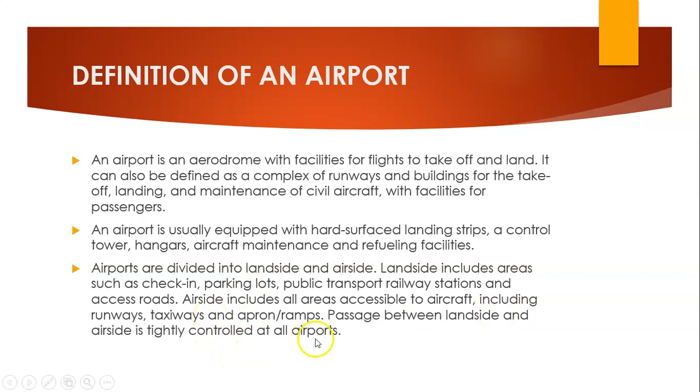The next thing we look at is the International Civil Aviation Organization, ICAO. The International Civil Aviation Organization was formed in 1947 under the auspices of the United Nations, and it established Flight Information Regions, FIRs, for controlling air traffic and making airport identification simple and clear.

The world's nations claim the right to control their own airspace, that is the portion of the atmosphere above their territorial jurisdiction, up to reaching space limits of between 80 to 100 km from sea level. For navigational purposes, this airspace is typically subdivided into classes, each with their own flying rules.

Airspace classification and their flying rules may vary between countries, although most countries follow either the ICAO's classification or a modified version of it. Airspace limits are shown in official charts.

We need to look at classification of aircraft size and runway length, and aircraft characteristics related to airport design. So when we look at how the aircraft properties or physical characteristics affect the design of the runway or provision of runway, aircraft characteristics are essential for the planning and design of airports.

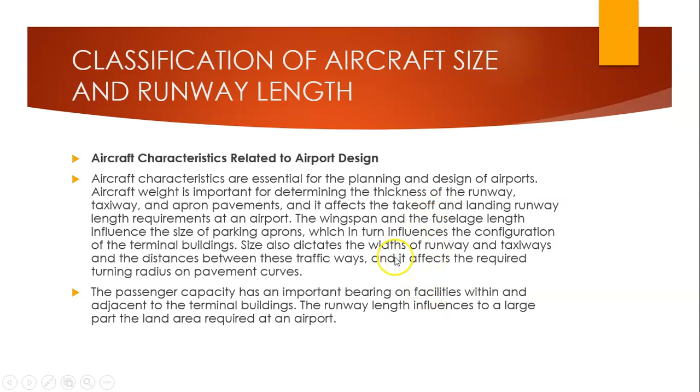So the features of the aircraft go a long way in affecting the size of the airport and its design. We also talked about the passenger capacity, because it also affects how the airport will look like, it affects the design of the airport. And the runway length also affects the size of the land provided during the design of the airport, to accommodate the taking off and landing of aircraft.

So we look at classification of aircraft size and runway length, the various runway lengths. Here we have the code elements, code number. We have code number 1 to 4. We have runway length, those that are less than 800 meters. We could name them A, and it accommodates aircraft with wingspan less than 15 meters.

Also, the outer main gear wheel span of the aircraft should be less than 4.5. The second one falls under code number 2, with the runway length from 800 to 1200, greater than 800 but less than 1200.

So the code falls between code letter B, and the wingspan is between 15, but it must be less than 24 meters. The outer main gear wheel span should be between 4.5 to 6. It must not be more than 6.

Then the third one is between 1200 to 1800. This is 1800, not 1200. So make necessary correction on this.

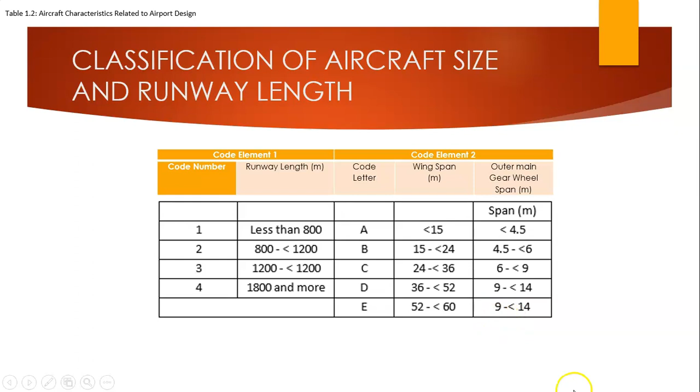Any other one falls between E, which has a wingspan of 52 to 60 meters, and the outer main gear wheel span should be between 9 meters to 14 meters. So we look at a sketch of an aircraft to be able to understand its characteristics.

The next thing we want to look at is the aircraft turning radius on pavement curves. Remember we said that the fuselage length and the wingspan length goes a long way to affect the size of the parking apron and other facilities.

So here we're trying to look at the turning radius when an aircraft tries to make a turn. This is the radius it takes. You can see from here the part of the nose gear. This is the nose gear and this is the main gear.

So you can see what we have here, part of the main gear. This is the radius it turns. This is the radius the nose gear takes. You can see it. Then we have the minimum turning radius.

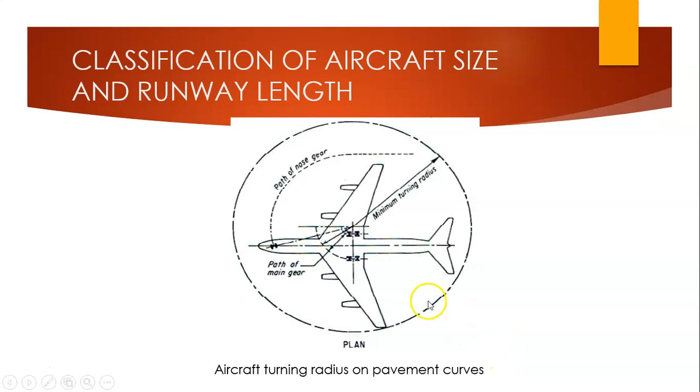We call this the minimum turning radius, while this one is the maximum turning radius. So the part of the main gear, you can see its part or its radius. This diagram gives us a clear view of the aircraft turning radius on pavement curves.

The next thing we want to look at is the components of aircraft weight. Based on the weight of the aircraft, we will be looking at the various terms we use in defining aircraft weight.

The first one is operating empty weight. Under operating empty weight, we're talking about the basic weight of the aircraft, including crew and all necessary gear required for flight, but not including payload and fuel.

The operating empty weight is not a constant for a passenger aircraft but varies with the seating configuration. So the operating empty weight excludes payload and fuel. Any other thing, the crew and the landing, every other component of the aircraft, excluding payload, which is every load that is paid for.

Including live human beings or passengers boarding the vehicle and goods that they are paid for. So they make up the payload, and with the fuel, when we exclude these from other things that are necessary for the taking off of the aircraft, we call it the operating empty weight.

Then the zero fuel weight, we call the zero fuel weight as the operating empty weight plus the payload. So we'll add the payload and exclude the fuel weight, so we call it the zero fuel weight. It means it contains no fuel.

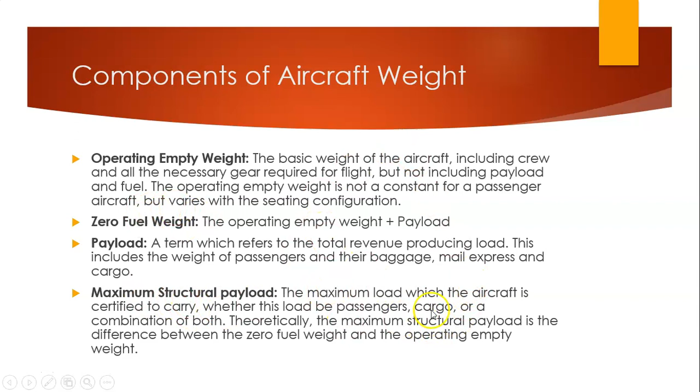Then the next thing we look at is the maximum takeoff weight of the aircraft. This is the maximum weight authorized at brake release for takeoff. It excludes taxi and run-up fuel, and includes the operating empty weight, trip and reserve fuel, and payload. So we are looking at the structural takeoff weight.

This weight excludes the fuel required for taxiing before takeoff. So when the aircraft is about to take off, it includes its own structural weight, which is the operating empty weight, plus the trip and reserve fuel, as well as the payload. It excludes any other fuel used for taxiing or movement before takeoff.

Then the maximum ramp weight is authorized for ground maneuver, including taxi and run-up fuel. As the aircraft taxis between the apron and the end of the runway, it burns fuel and consequently loses weight. The difference between the maximum structural takeoff weight and the maximum ramp weight is very nominal.

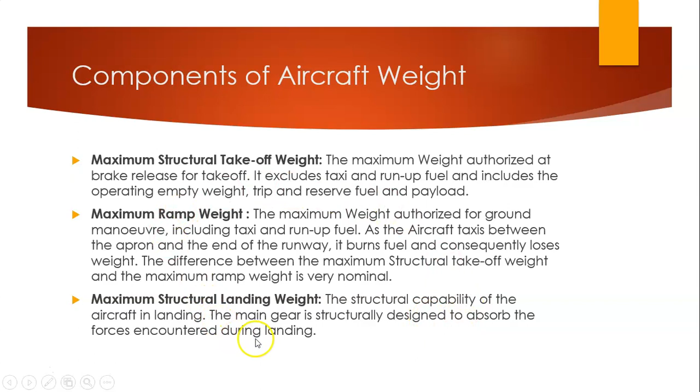The maximum takeoff weight varies between 36,000 kg to 350,000 kg. The maximum number of passengers varies between 65 to 500. Runway length for typical airline aircraft varies between 1,800 meters to 3,600 meters. It will be noted that the heavier an aircraft, the longer it is, and the greater is its wingspan.

As the range of an aircraft increases, the proportion of trip fuel to takeoff weight increases, while the percentage of payload decreases. So we are trying to look at the minimum and maximum weight of aircraft and the runway length for airlines that should be provided to accommodate takeoff and landing, which we said is between 1,800 to 3,600 meters. These are things we need to consider.

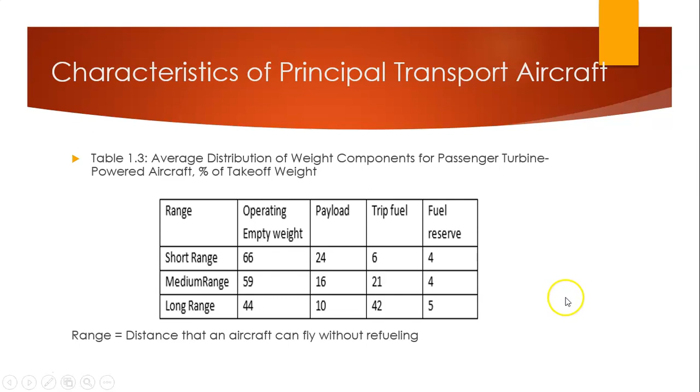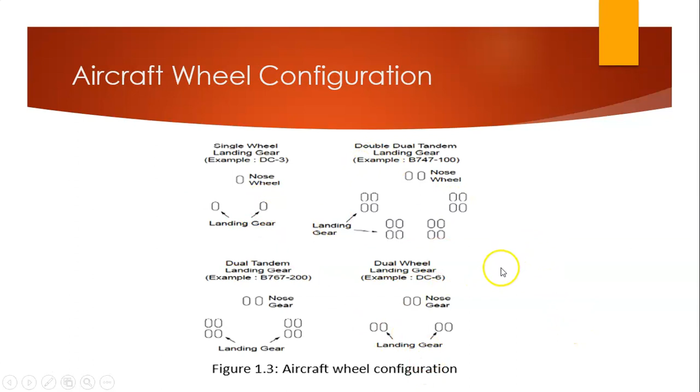So we're trying to look at aircraft wheel configuration, so we'll be able to use it to distribute loads during airport pavement design. We'll see how these can be useful in carrying out our airport pavement design.

Next we look at the static weight on the main gears and the nose gears. Based on the diagram we looked at, the distribution of the load between the main and the nose gears depends on the type of aircraft and the location of the center of gravity of the aircraft.

For any gross weight, there is a maximum aft and forward center of gravity to which the aircraft can be loaded for flight in order to maintain stability, which is very important. The distribution of weight between the nose and main gear is not constant. For pavement design, it is normally assumed that 5% of the weight is supported on the nose gear, while the remainder is on the main gears.

Thus, if there are 2 main gears, each gear will support 47.5% of the total weight. Let's take a simple example to clarify this point.

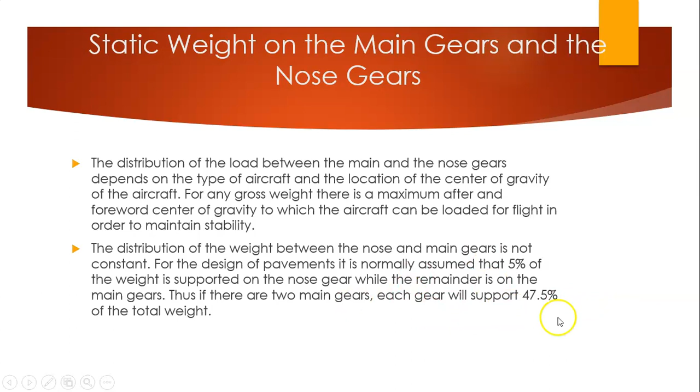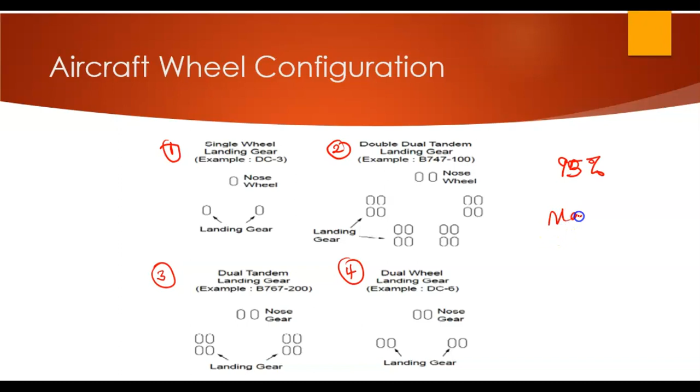For the structural design of aircraft pavement, we consider that 95% of the weight of the aircraft goes to the main gears, while 5% is carried by the nose gear. Based on the diagram, you can see the nose gears or nose wheels here, and the main gear here. So we are saying that 95% of the weight of this aircraft is carried by the main gear, while 5% is carried by the nose gear.

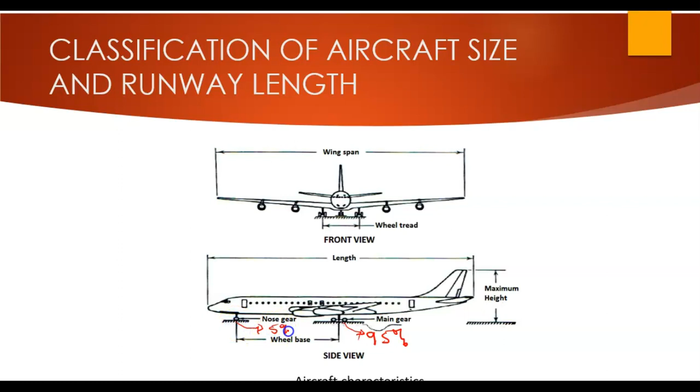So what we need to do is go back to the dimensions. We said the maximum takeoff weight varies between 36,000 to 350,000 kg. Let's use these weights for the purpose of illustration and our calculation.

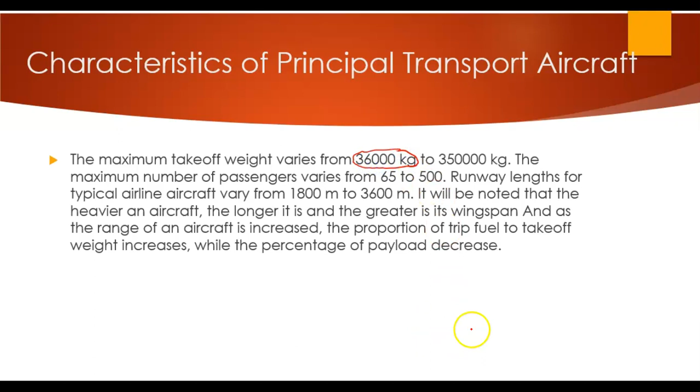For our single wheel landing gear, if the total weight of the aircraft is 36,000 kg, it means for this single wheel landing gear we want to know the distribution of load on the nose wheel and on the landing gear.

We said 95% is carried by the main wheel, beg your pardon. We have two landing gears sharing 95% of the weight, and 5% is carried by the nose wheel. So we calculate 0.95 times 36,000, and 0.05 times 36,000.

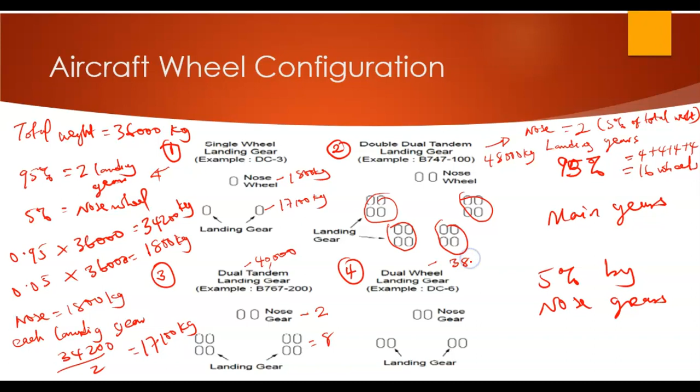Let's say this one is 40,000, and this one is 38,000 total weight. Why this one is 2, though we said we have a total of 4, is because the landing gears are 2 plus 2. I have this and this, so when we add it, we will have a total of 4. And the weight is 38.

So now let's go back to our board for calculation. The first thing we have here is our 36. The second one, number 2, is the double dual tandem. This one is for, we perform calculation for a single wheel landing gear, where the nose wheel has only one wheel.

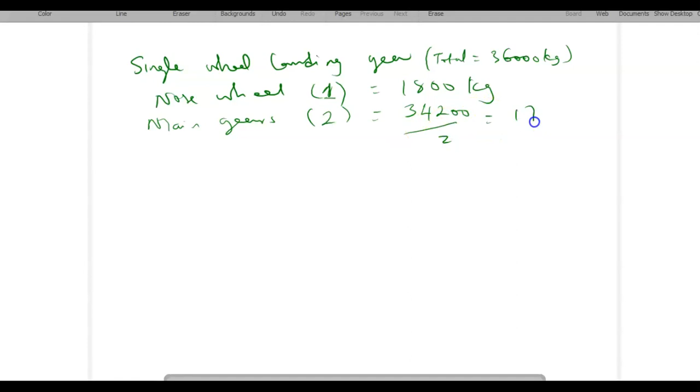Nose wheel is 1 in number, and it carries a total weight of, my calculation, 1,800 kg. The total weight is 36,000 kg. Then the main landing wheel, we'll call it the main gears. This one, they are 2 in number, so we're sharing the load: 34,200 over 2, which is 17,100 kg. So this is our first calculation.

For the second one, we have already done the analysis previously. Let's look at what we've done. Here you can see what we have for the double dual tandem landing gear. Total weight of 48,000. Then we have a total of 2 nose wheels and 16 landing wheels. So this is the dual tandem, number 2.

So for this one, the nose is equal to 2 wheels, the nose gear. The main gear is equal to 16 wheels, and we are sharing a total load of 48,000 kg.

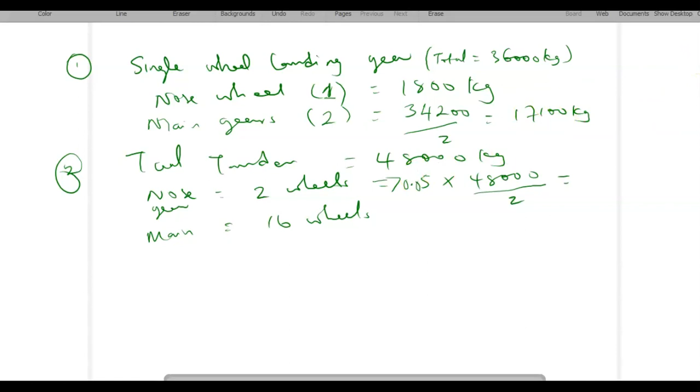So what we have to do here: the 5%, which is 0.05, multiplied by 48,000, and because there are 2, we divide by 2. Let's pick a calculator to show our calculation. 0.05 times 48,000 gives us 2,400. We divide it by 2, and this gives us 1,200 kg.

For the main gears, this will be equal to, we multiply by 0.95. So we times it by 48,000 and divide by 16 wheels. 0.95 multiplied by 48,000 equals 45,600. This is the total weight.

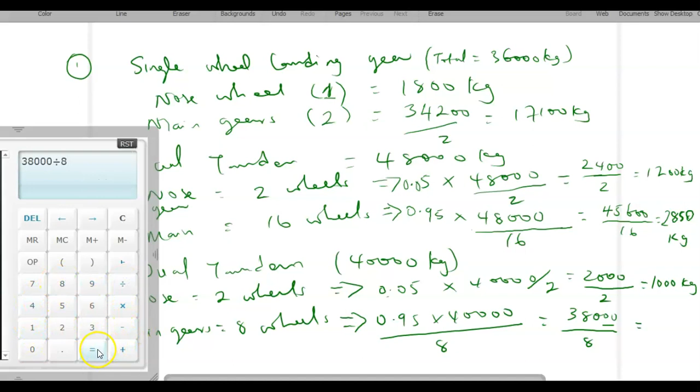Then for this one, we go back to our calculator. We have 0.95 multiplied by 40,000, equal to 38,000. We divide this by 8 since there are 8 wheels. 38,000 divided by 8 equals 4,750 kg. That's what we have on each wheel.

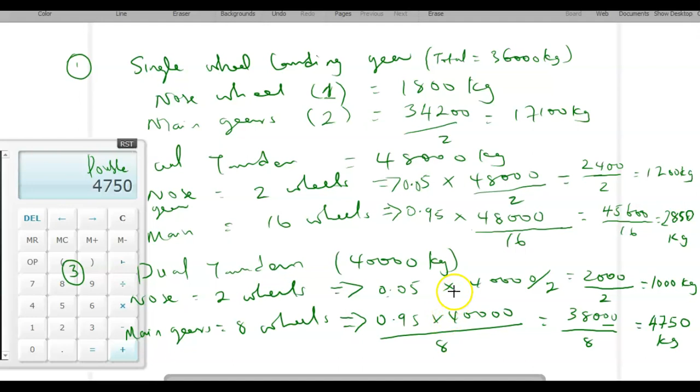So this is for the dual tandem. We drag our calculator back and wipe our board for clearer space.

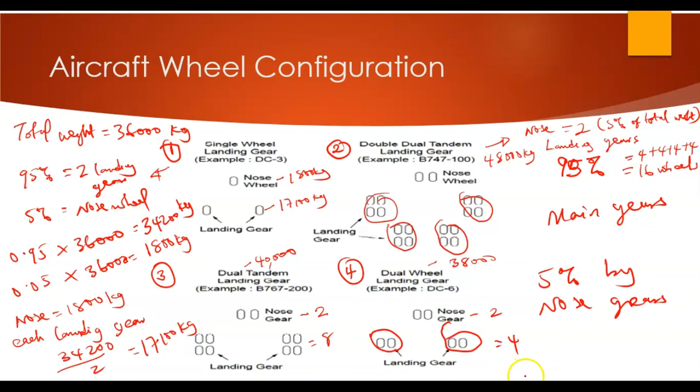So for the last example, the fourth example, let's go back to our previous calculation. For the last one, we have the total. This one is for an aircraft with dual wheel landing gear. Total weight is 38,000. Nose wheels are 2, and main landing gears are 4. Go back to our calculation sheet. Here we have this for a dual wheel, the dual wheel landing gear. So write down dual wheel. We have the nose, total is 38,000 kg.

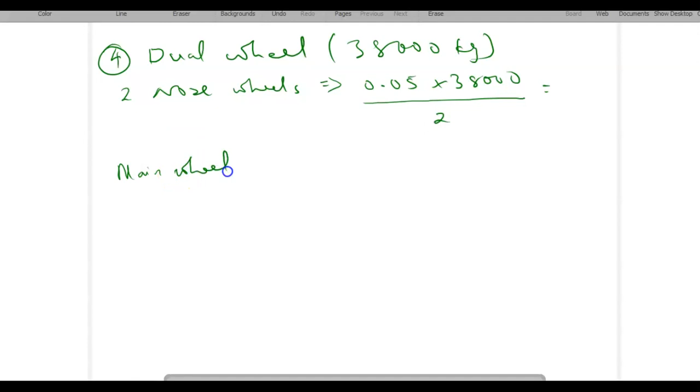We have two nose wheels. This will equal 0.05... we'll look at 5% carried by the nose wheels, times 38,000, divided by 2. We'll drag our calculator to get the appropriate answer. Then for the main wheels, or main gears, there are 4 in number, and 95% of the load is carried by these wheels. 38,000 divided by 4 since they are 4 in number. We drag our calculator out to perform our calculation.

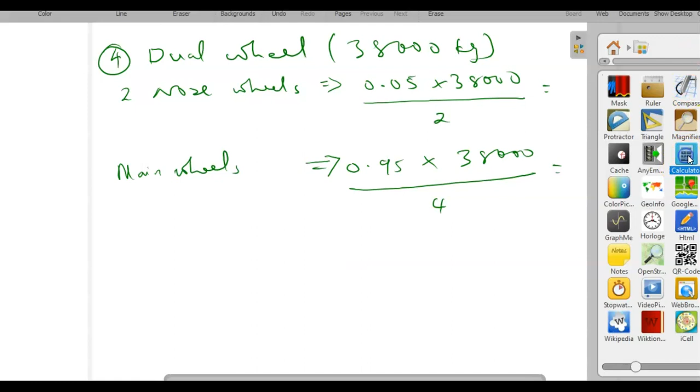For this one, we're looking at 0.05 multiplied by 38,000, equal to 1,900. 1,900 divided by 2 is equal to 950 kg.

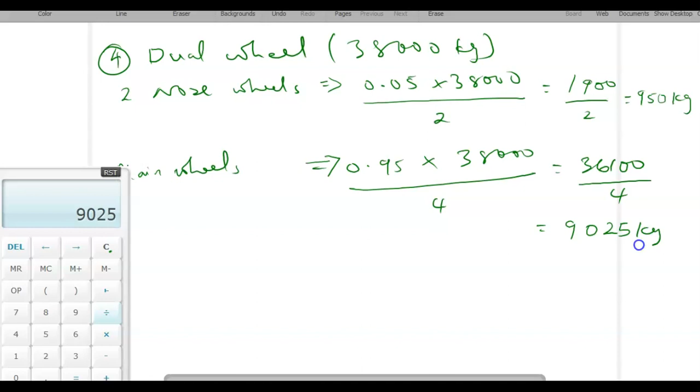For this one, 0.95 multiplied by 38,000 leaves us with 36,100. We split this by 4 gears. 36,100 divided by 4 equals 9,025 kg, which is the total weight carried by the main gears.

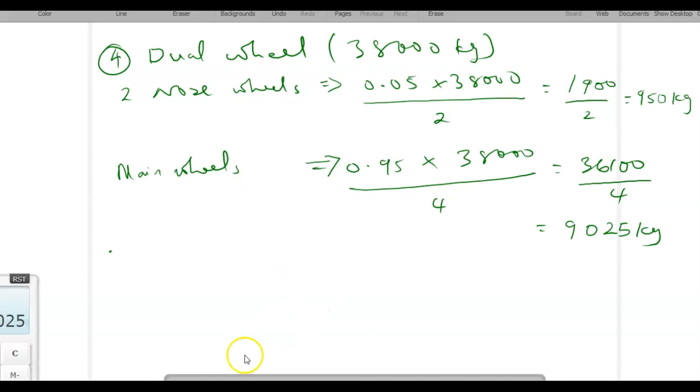So the total weight for the main gears is this, and for the nose gears is this. We've shown how aircraft weight is distributed: 5% on the nose gears and 95% on the main gears, illustrated for the 4 aircraft examples.

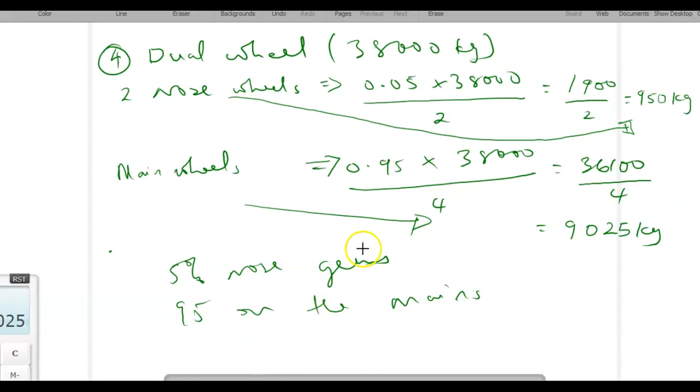The next thing we look at is runway length. A runway is defined as a rectangular area on a land aerodrome prepared for the landing and taking off of aircraft. Runways may be a man-made surface, often asphalt or concrete, which is a rigid pavement, or flexible, or a mixture of both, or a natural surface such as grass, dirt, gravel, ice, or salt.

Runway dimensions vary from as small as 245 meters long and 8 meters wide at smaller general aviation airports, to 5,500 meters long and 80 meters wide at international airports built to accommodate the largest jets, to the huge 11,917 meters by 274 meters lake bed runway at Edwards Air Force Base in California, a landing site for the retired space shuttle. This is one of the biggest airports we have, with a dimension of 11,917 by 274 meters, catering for the retired space shuttle.

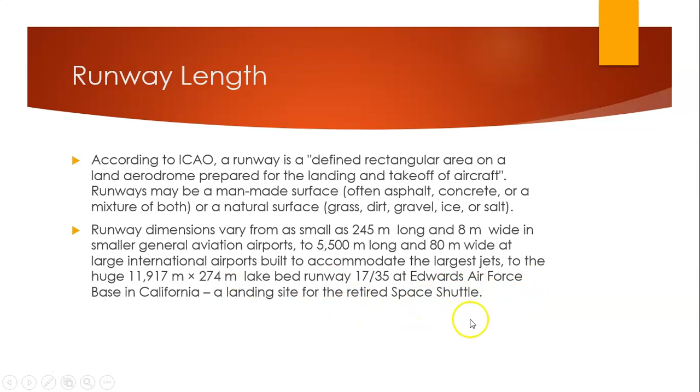For runway length, a runway of at least 1,829 meters is usually adequate for aircraft weighing below 90,718 kg. Larger aircraft, including wide bodies, will usually require at least 2,438 meters at sea level and somewhat more at higher altitude airports. International wide body flights, which carry substantial amounts of fuel, are therefore heavier. They also have landing requirements of 3,048 meters or more, and takeoff requirements of 3,962 meters. At sea level, 3,048 meters can be considered an adequate length to land virtually any aircraft.

An aircraft taking off at a higher altitude must do so at reduced weight due to decreased air density at higher altitude, which reduces engine power. An aircraft must also take off at a reduced weight in hotter, heavier, or more humid conditions.